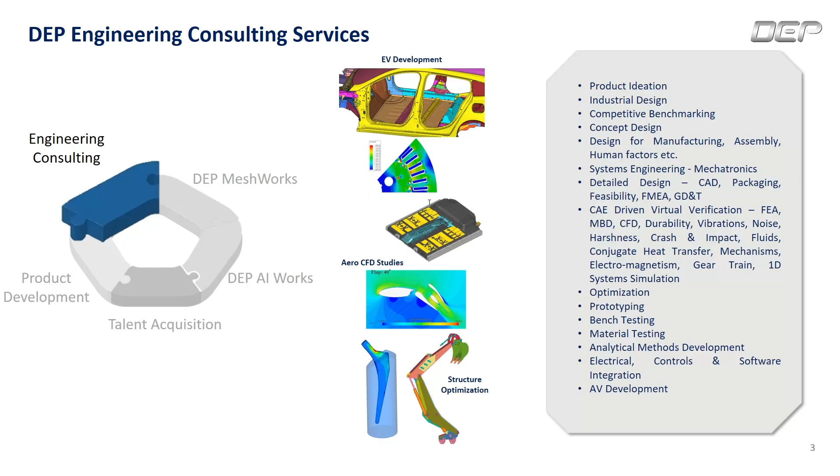Under product development, it's primarily the electromechanical product development team. This team, beyond engineering services, develops complete electromechanical products. Our capabilities include concept generation, mechanical design, electronics integration, prototype development, testing, and product validation. Whether it is electric mobility, industrial products, or smart connected systems, DEP supports the customers from concept to production.

You see the tools like power tools, electric power tools, combustion sensors, drone technology, or improving the engine efficiency. These are all in-built products that we have developed in-house.

Another key pillar is the staffing or talent acquisition team. We provide specialized engineering workforce solutions across multiple domains, including automotive, aerospace, electrification, or embedded systems, and not to mention CAE. This allows us to support customers not only with the technology, but also with highly skilled engineering resources. So we have a pool of engineers whom we place across the industries.

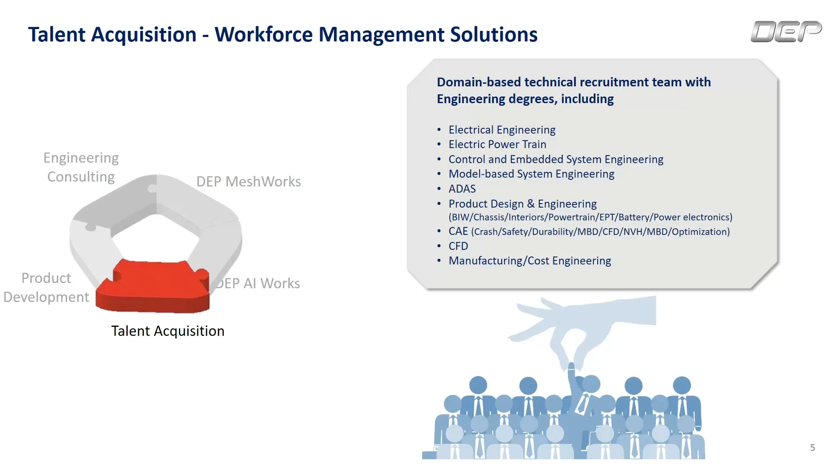Coming to the flagship product, which is MeshWorks. MeshWorks is an integrated CAE platform that helps engineers automate model preparation, meshing, concept modeling, optimization, post-processing, and other workflows. It significantly reduces engineering effort and improves productivity, enabling engineers to focus more on innovation than carrying out repetitive tasks.

Multiple modules are integrated in MeshWorks, right from meshing, where complete meshing and modeling integration can be done. Once integration is done, you set up a run for any domain, maybe crash or durability, run it in third-party solvers, and using the post-processor, we do complete post-processing of the results.

Once results are achieved, and you see it may not be meeting your performance targets, then we use concept modeling tools to create new concepts or improve the performance. For example, you add a rib or remove a rib, change the thickness of a rib or the wall of a cast component, and it can be quickly modified or changed in MeshWorks.

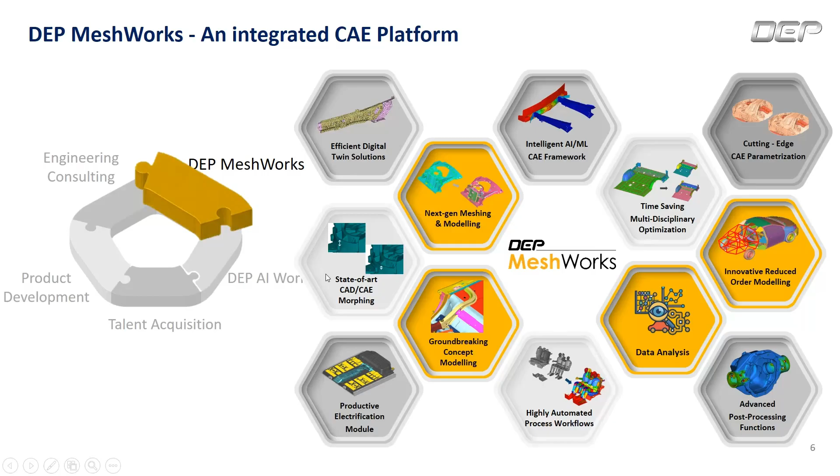Likewise, there are many modules in Meshworks. Coming to the next key component, which is today's focus, is AIWorks.

AIWorks is DEP's physics-driven predictive and generative AI platform. It supports engineers across the complete product development life cycle, from concept design and detail engineering to validation. Our technical team will shortly demonstrate these capabilities in greater detail.

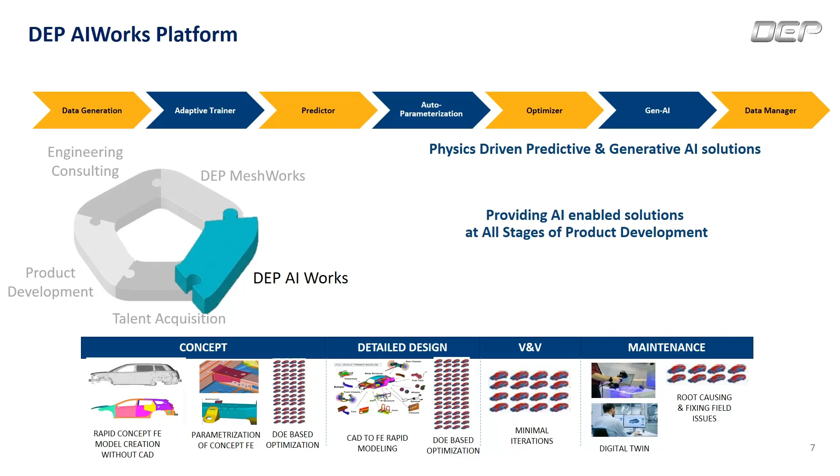With that brief introduction to DEP, let us now move to the main focus of today's seminar. Today's session will explore how physics-driven predictive and generative AI is reshaping product development and manufacturing, and how AIWorks is enabling engineering teams to design smarter, innovate faster, and significantly reduce development time. It is now my pleasure to invite Mr. Arul Ganeshan and Jashwant, who will take you through the technical presentation and demonstrate the capabilities of AIWorks.

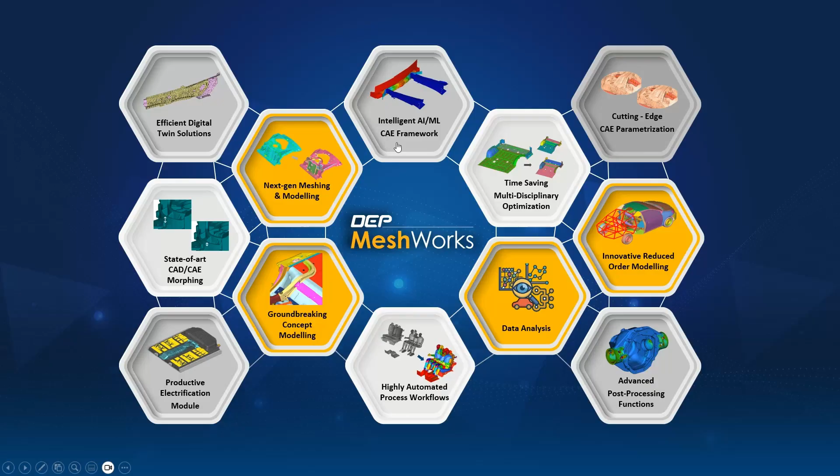Our focus today is on AI Works itself. This parameterization will come back in the scope of Features AI. But AI Works is the AI module within Meshworks. In fact, we have branched it out into a separate entity, which we're calling DEP AI Works. Within AI Works, we have 4 sub-modules: Simulate AI, Features AI, Geom AI, and Agentic AI.

Simulate AI is the ability to have a surrogate model for performance prediction. So we give the CAE engineer the ability to take any historical data he may have—solver input data, solver output data for some designs he's already worked on in the past. He can take that data and create a model using the library of architectures available within AIWorks, and use that as a quick predictive tool, a quick answer to help give quick feedback to the design engineer. So that's the idea of Simulate AI.

Features AI, as we explained, helps in the meshing process by automatically recognizing CAD features that may be repeated in your organization, and then using that recognition to apply a custom mesh or a custom type of modeling for that, if it is a fastener, for example.

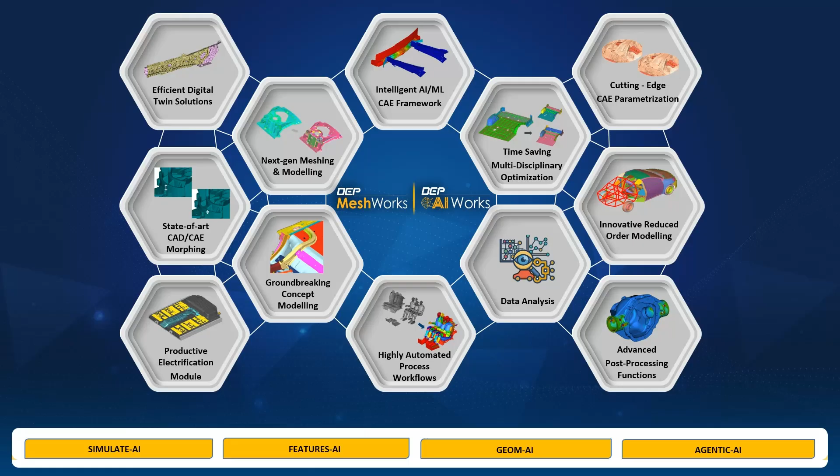So a quick recap of what Simulate AI is. Again, it's a surrogate approach to performance prediction. It involves a sequence of steps. It always starts with data—we need a decent amount of data to build a model. But if you don't have data, we can help you there by using the parametric capabilities within Meshworks.

Take 10 models and make that into 50 models by parameterizing the design and then exporting 5 models for each baseline design. And obviously you run the solver, and now you have 50 different designs which capture the variation that you are going to expect and need to help predict.

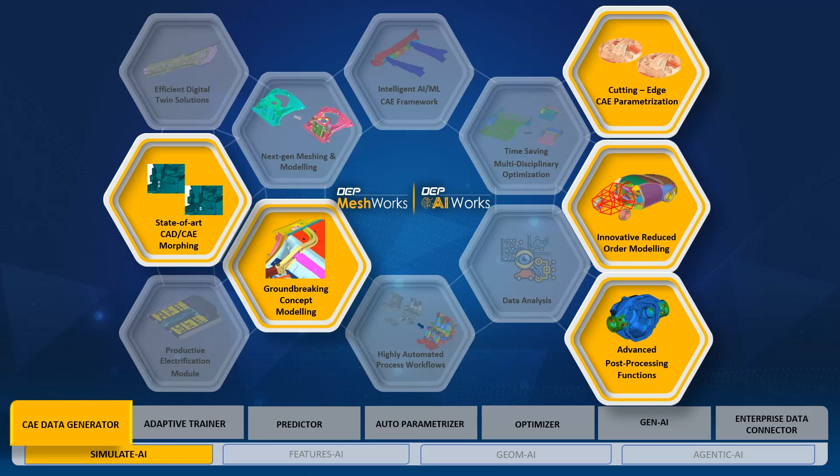For the AI model, those are supplementary tools to help you make up training data if you don't have sufficient. And then the heart of AIWorks is the adaptive trainer, where we have a library of deep learning architectures at your fingertips, so that you can adapt your particular problem to a particular architecture and use that to create a solid predictive model. This is the workflow.

I think it's not new to most people, but you start with data. You have, for example, 50 different STL files of exterior profiles, and you have 50 drag coefficients for each of those profiles. So now you would like to create a predictive model to be able to bring in a new exterior profile. You don't want to run a CFD analysis.

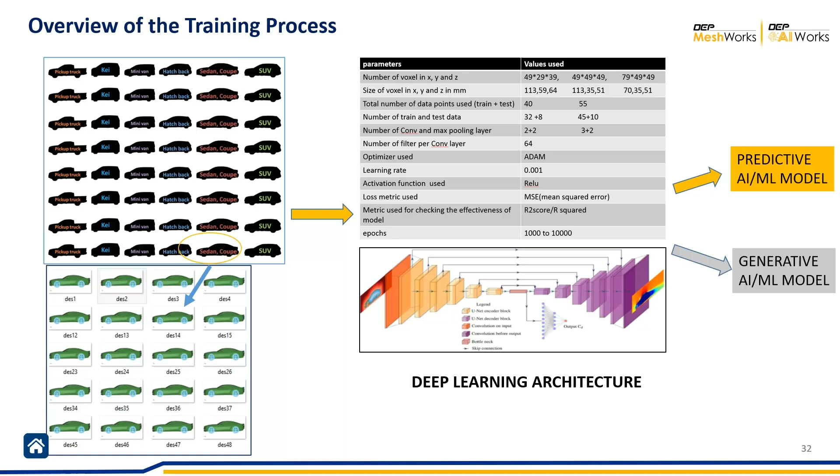In a few minutes, you want to predict the drag coefficient. So you take all 50 profiles and their associated drag coefficient. You use an architecture available in AIWorks, create a model, and then next time the styling engineer provides a surface, you can bring it into AIWorks, click a button, and within a few minutes, you will get your drag coefficient. So that's the idea, and this surrogate approach is becoming more and more popular in the CAE world, as companies try to speed up their product development process and give the company a competitive edge.

So what can we predict using the surrogate approach? We can predict scalars—the example I just talked about was a scalar response where we are predicting a number, a drag coefficient. We can also predict vectors, a force displacement type of curve or an acceleration time curve.

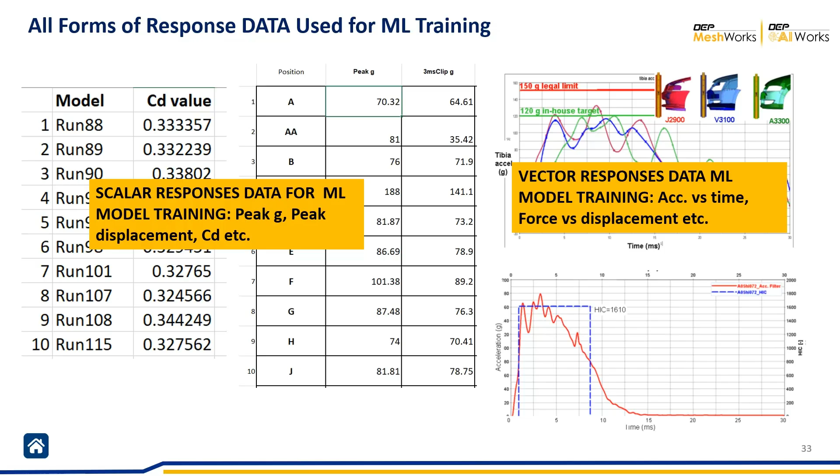So whatever a physics-based solver gives you as a metric for your performance, a surrogate approach can be created. We can also create a surrogate model for contours, like a pressure contour, a velocity contour, etc. We can also create a model for predicting the time history.

Suppose you're interested not only in the final displacement and stress profile, but you want to see the sequence of deformation steps from the start of loading to the end. We can create a model that gives you all those time steps. Obviously, the memory and time taken to create such a model will increase because there's more data, but it is doable. If you are using a superelement type of analysis, where you're representing a submodel in your larger model as a stiffness matrix, we can create a model to predict stiffness matrices as well.

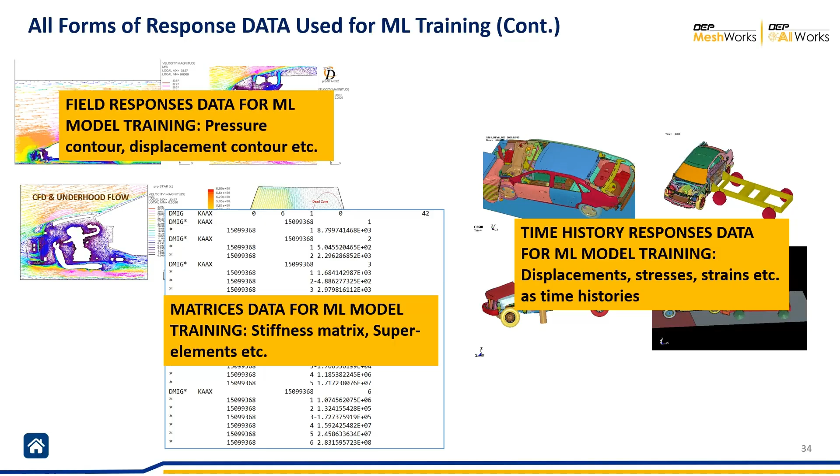Now we just want to give you some background on CNN. Again, I don't want to repeat the first session, but CNN uses the same logic as you would use in an image recognition architecture.

You pixelate an image and associate a label in the image to the topology of the pixel. By training it with several images, you can bring in a new image, and by identifying the pixel topology, it will return the label or the number.

So it's the same idea we are using for performance prediction, for example, drag coefficient. Instead of a 2D voxelization, we are doing a 3D voxelization. We are taking the full volume of the training set, discretizing it as cuboids or voxels, and trying to make a relationship between a particular voxel topology and an associated drag coefficient. By training this type of data, we can bring in a new exterior profile, and the model will predict the drag coefficient.

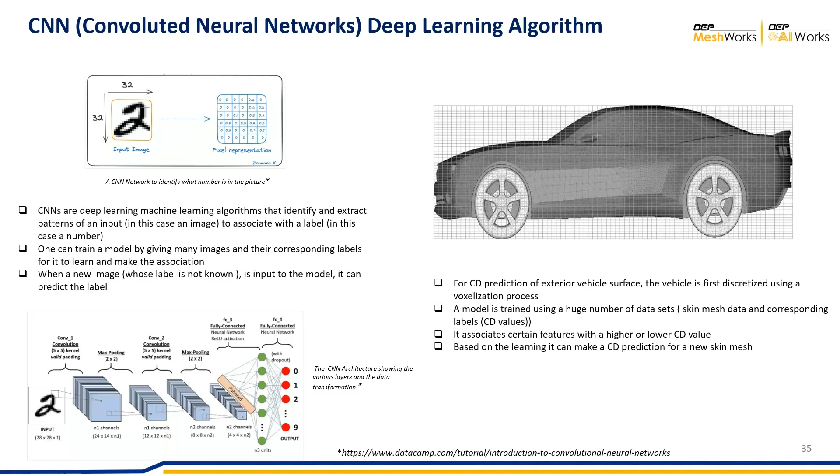We've got very good accuracy, to the point of 99%, with that CNN approach for scalars.

A more popular architecture is graph neural networks, where data is stored in the form of a graph. You have a nodal XYZ and connected nodes, and you can try to make an association between that data and the corresponding nodal output. For example, the node XYZ and the corresponding connected nodes in your mesh, and the pressure at that node, can be an output for training.

So this is a graph neural network. It works well because most of our CAE models are in the form of a mesh. So you have a node which has an XYZ coordinate, and you have connected nodes through the elements.

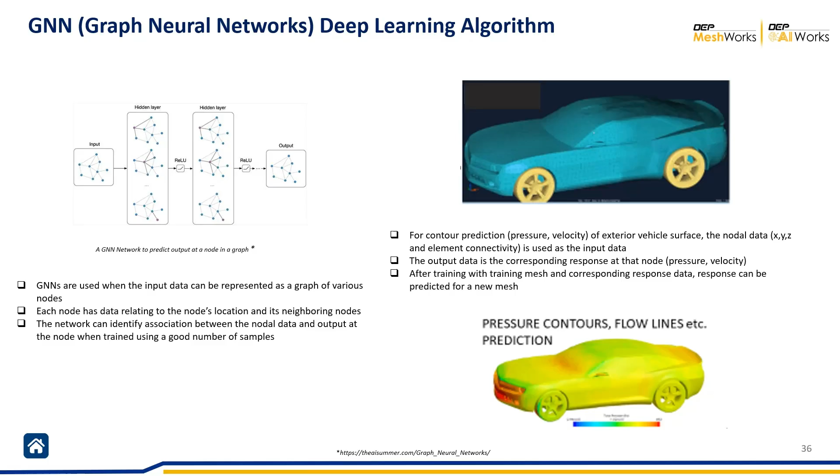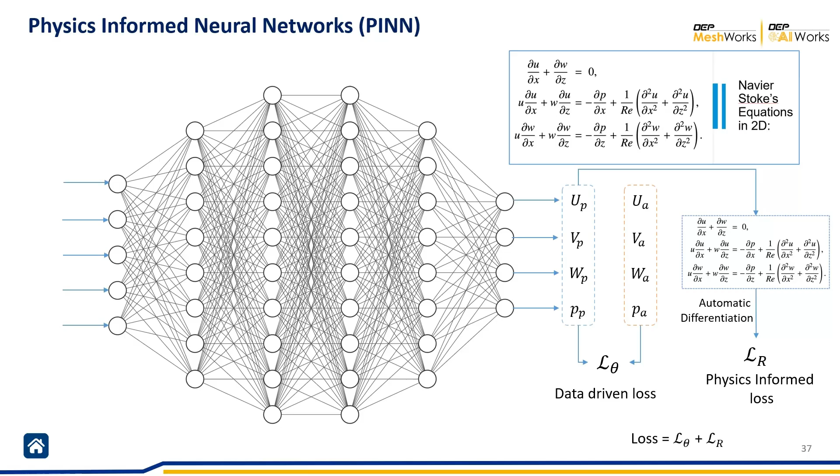Something we also use quite a bit is physics-informed neural networks, where we bring in physics laws in addition to data-driven laws to help guide the training to a more physically satisfying solution. What I mean is we're not just trying to fit data, we are trying to make sure that the solution matches the physics of the problem as much as we allow it.

The other good feature within AIWorks is the ability to give some intelligence to the training. We can force certain nodes to be zero displacement when we know that they are constrained nodes. And when there is an area of interest, like on a hood where the indenter hits the panel, we can focus our training on those areas so that the loss is reduced even further compared to the general area of the hood.

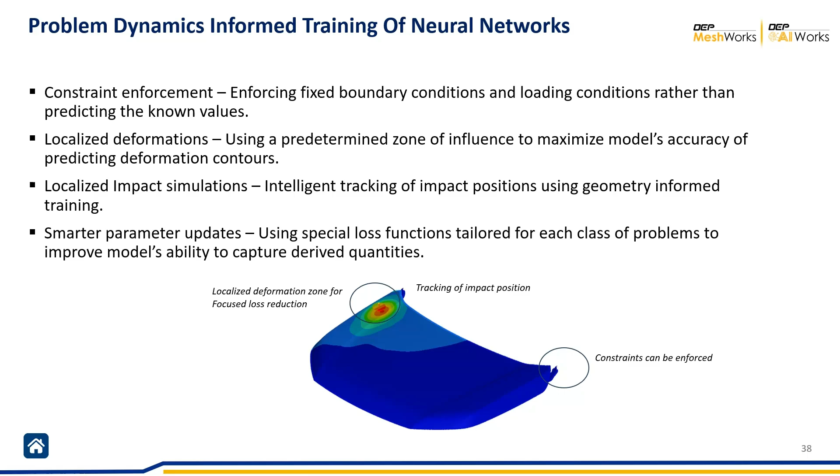We also have good metrics to evaluate a machine learning model, and also metrics to check if a model we are going to use on unseen data is actually a good value.

Sometimes we have a machine learning model based on a few specific types of training data, and we want to use that model to predict the response of very generic input data. We know that's going to be a challenge, but before we even attempt that, we can do what is an equivalence score. It's really a quantification of how new unseen data fits in with the original training data. The idea is if it fits in well, then we know the prediction is going to be good accuracy. If not, we can't expect a good accurate prediction.

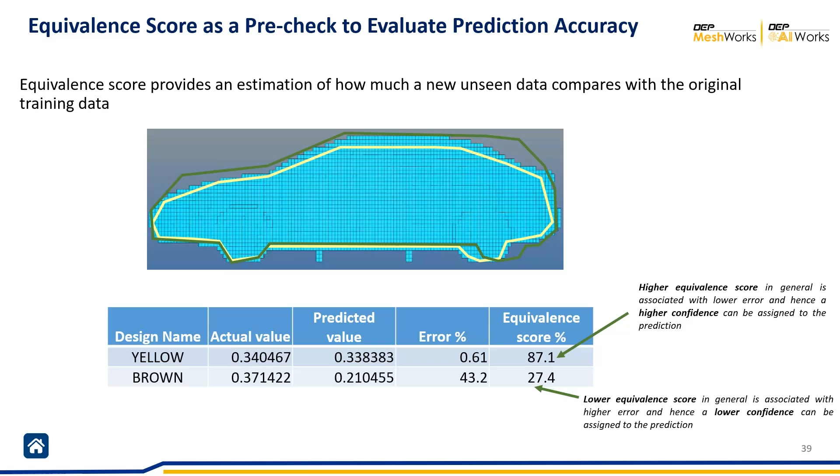So there are tools to help you in that. The auto parameterizer helps you parameterize automatically without the investment in time of manual setup.

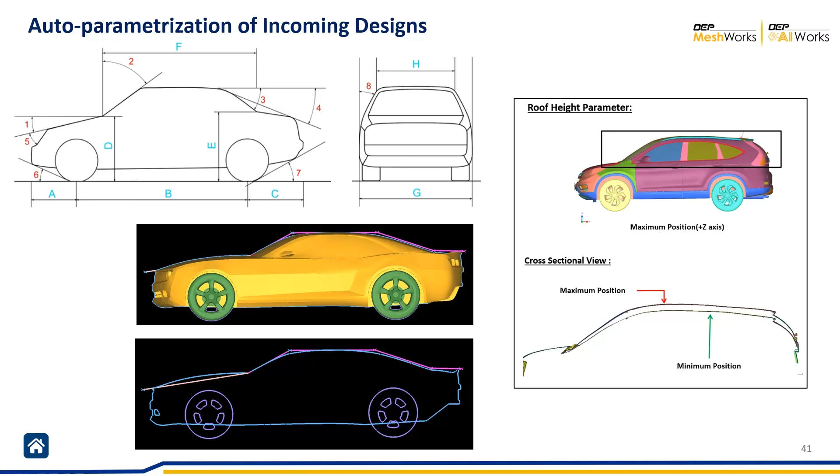So if your baseline model is not meeting performance and you want to improve it, or you just want to do what-if studies, you can use auto parameterization to parameterize your model, and then use the optimizer's inbuilt algorithm, which uses the design space defined by the parameters of the model, the min and max values, and allows you to optimize for mass or a particular performance criteria. The only difference is it's now using the machine learning model as a solver as opposed to a CFD or a Dyna.

This really speeds up the whole optimization process. What might have taken a week to run can now be accomplished in much less time, and we've given lots of examples of that in the last two sessions.

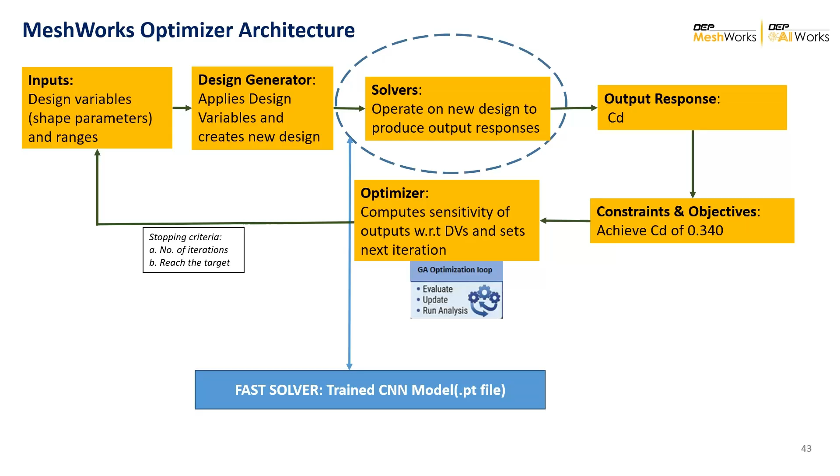One example is this drag coefficient, where you can quickly ask the solver to give you a shape that meets a particular drag coefficient. So you have a well-trained machine learning model and a parameterized design, and it will iterate within the min and max ranges of the parameters and arrive at a solution that meets your drag coefficient, providing the value for each parameter. This is very powerful, and we know organizations that have adopted this type of approach.

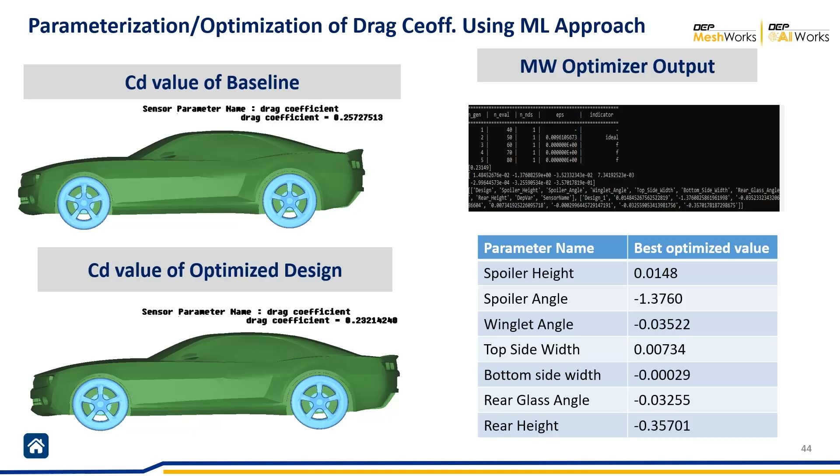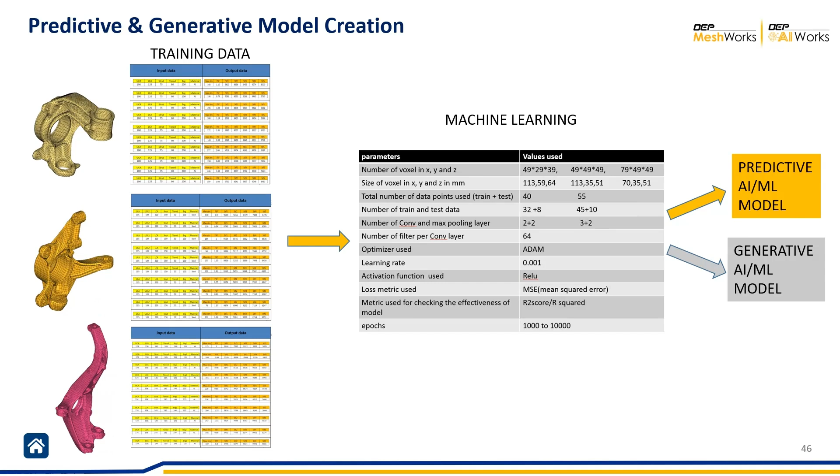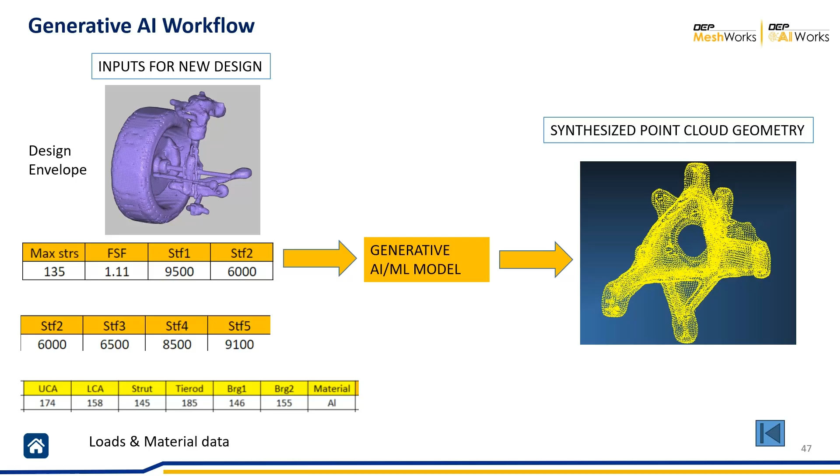Gen AI is the idea where you're not using a model to predict performance of a design - you're specifying the performance you need, and the model returns a design that matches it. Think about a knuckle that we have lots of data for; we have the stiffness at the interface values. When we have 500 or 600 data points, that's the number we need for a Gen AI model. We can train a CGAN architecture, a generative architecture, to take in specified performance, and the model will return a point cloud. It won't give you Nastran data or CAD data, it will give you a point cloud, and we can take that point cloud and create a concept mesh with it. That's the idea of Gen AI.

To be able to manage all this data, we have a good data connector architecture. When you create a machine learning model once, it's not done - sometimes you get new training data, so you can continuously augment your model by adding that to the training, maintaining a good model and updating it as training data becomes available. For that, we provide a good database to manage it all.

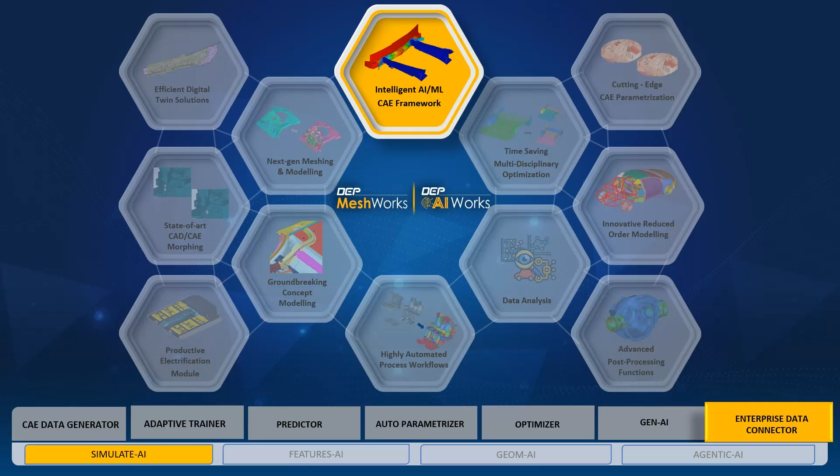So the focus of our discussion today is features AI, where we're helping the meshing process using AI models. Again, there are three steps: parameterization, data creation. To train a model to recognize certain CAD or mesh features, we need a lot of data, and sometimes you may not have sufficient data, so we provide tools to help with that.

One of them is the CAE parameterization that Ravi talked about earlier. Again, the idea is you have a baseline model and you parameterize the critical or structural features that impact performance. From one baseline model, you can create 30 more models without doing any manual remesh, without going back to CAD and creating new CAD designs. Everything can be done in the CAE environment.

And with the click of a button, you can create a good number of DOE samples. It does require some setup where you establish your control nodes, the direction of motion you want to influence, define the boundary nodes which move along with the control nodes, and then define the constraint nodes which don't move at all. But once you understand this concept, you can take a design and create many parameters on your own, specify a min and max range, and quickly create a DOE for your optimization or other purposes.

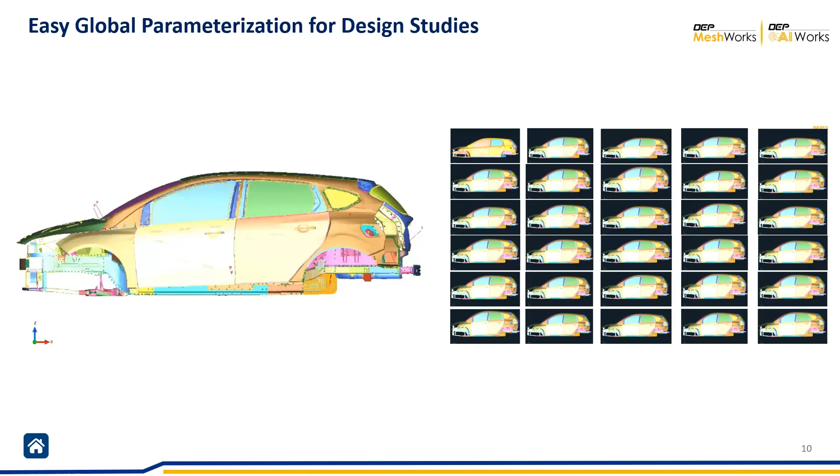The parameterization can also be at a very local level. So local features like ribs, holes, slots, welds - we can parameterize the number of welds very easily. Weld optimization can sometimes be a pain if you're manually changing the position and number of welds. But once you create a spot weld parameter, you can easily go from 100 spot welds to 60 spot welds.

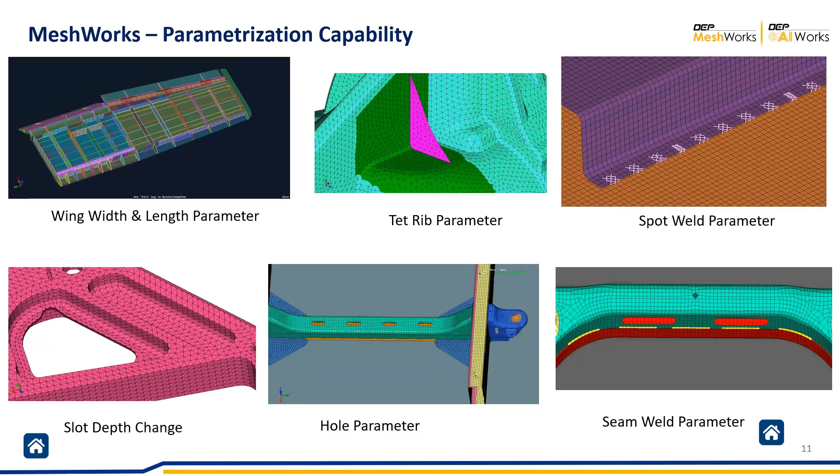It will automatically readjust the length between the welds so that it is a good, nice connection made between two parts. So the idea is, in your training for Features AI, where you don't have enough data to train a Features AI model, you may be able to use tools like this to add more data, creating more features or changing their shape so that even subtle differences in your feature can train the model to recognize that. The more data, the more accurate your Features AI model will be.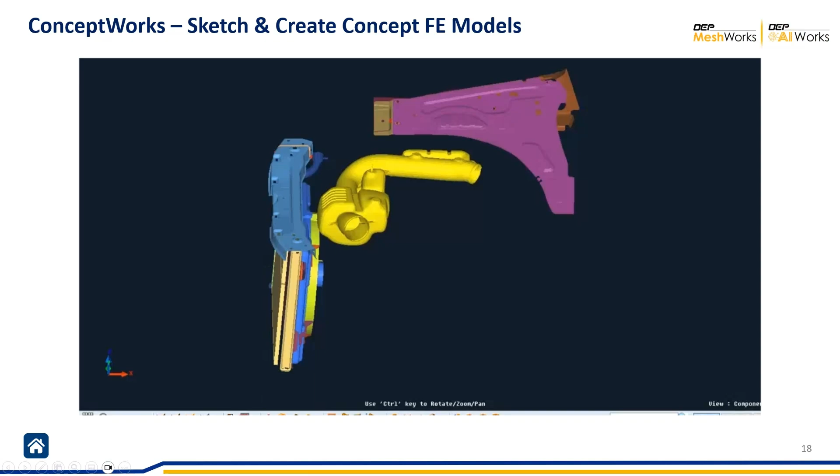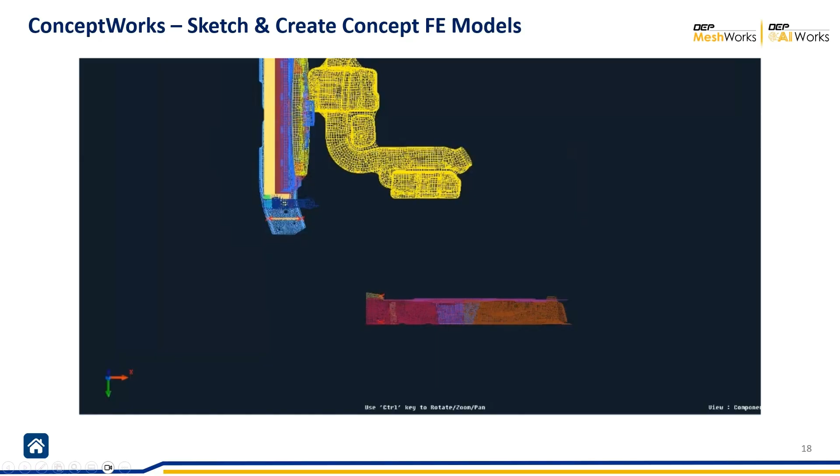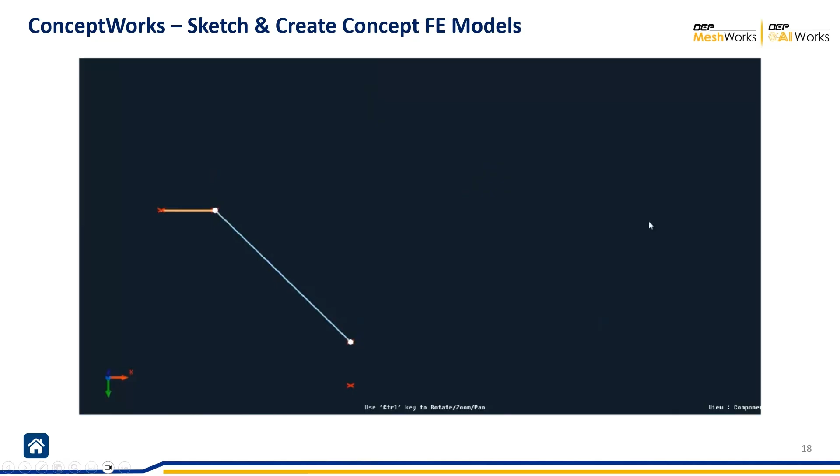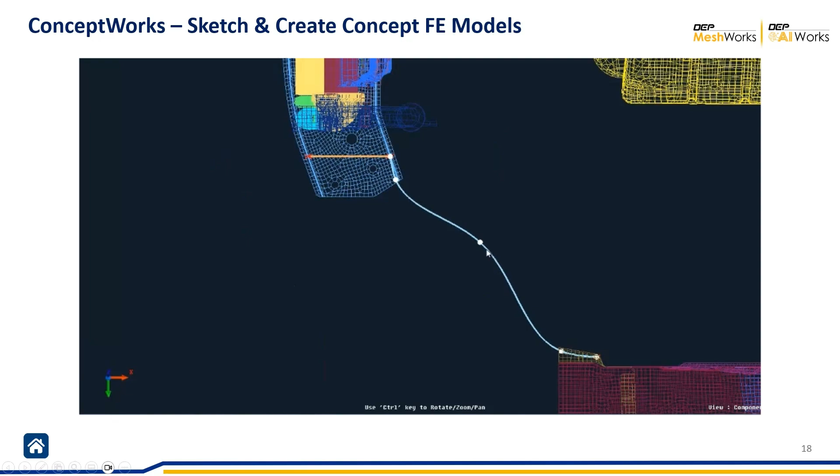Another tool available to augment your training data for Features AI is concept modeling, again alluded to at the outset by Ravi. This is the ability for a CAE user to create his own designs in the absence of CAD. For example, in a concept design, you have a tie bar and a fender, but no connection between the two. Using tools within ConceptWorks, you can create a line between these two parts and then change the line to mimic a structural member, a continuously flowing structural member, and create a link between your tie bar and your fender.

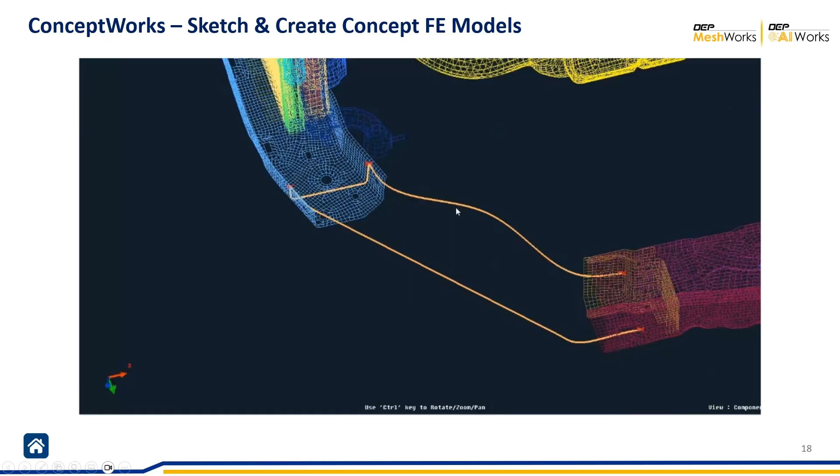You extrude that to create an actual 2D section. So tools like these, to help create models when you don't have CAD, are particularly useful. In the context of Features AI, you may need to use these kinds of tools to add to your database - for example, doublers, when you want to create a reinforcement.

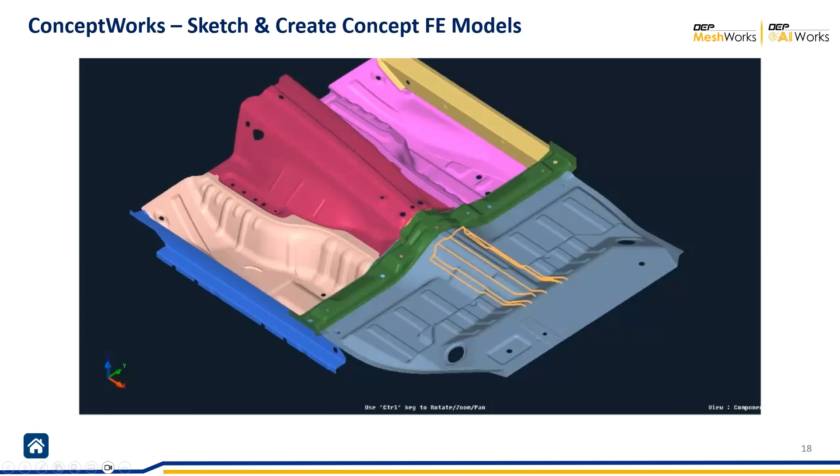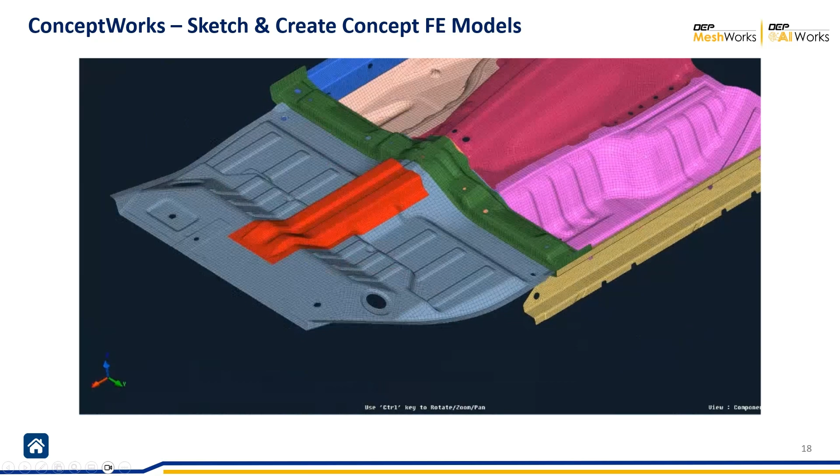You don't want to lose time asking the CAD engineer to provide CAD for that. You can take the elements of the parent sheet metal and then create a reinforcement using these lines as shown here. So these are very powerful tools to help you generally in product development at the concept stage, but also in adding to your training database.

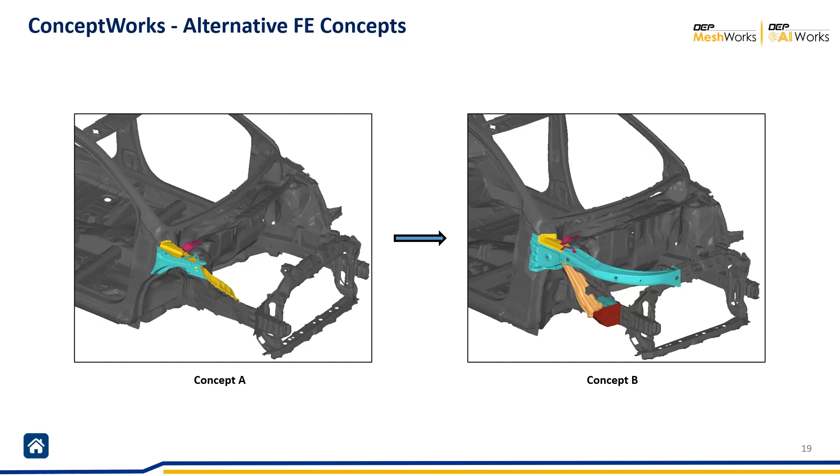Sometimes we are playing around with different concepts for a particular load path, so ConceptWorks can help you in that regard as well. At a local level, if you want to add more ribs, you're able to use ConceptWorks to quickly create ribs - no need to create CAD first and then create a rib. So the idea is we have a tool here that helps you create designs when CAD is not available, and this can be used for supplementing your training data.

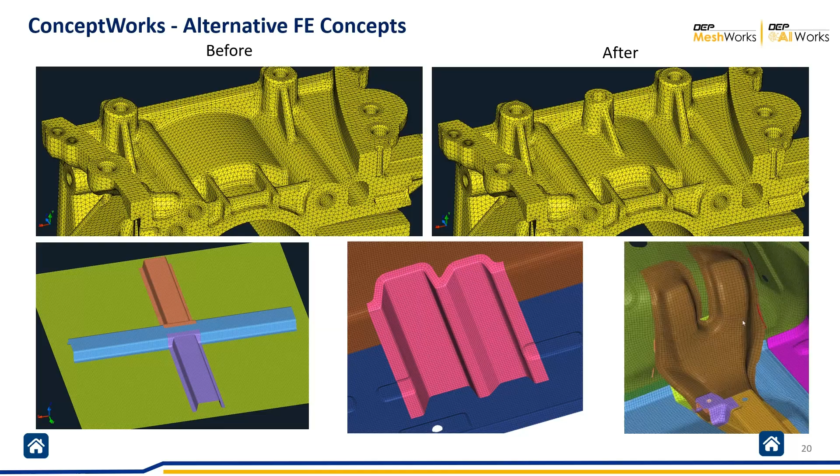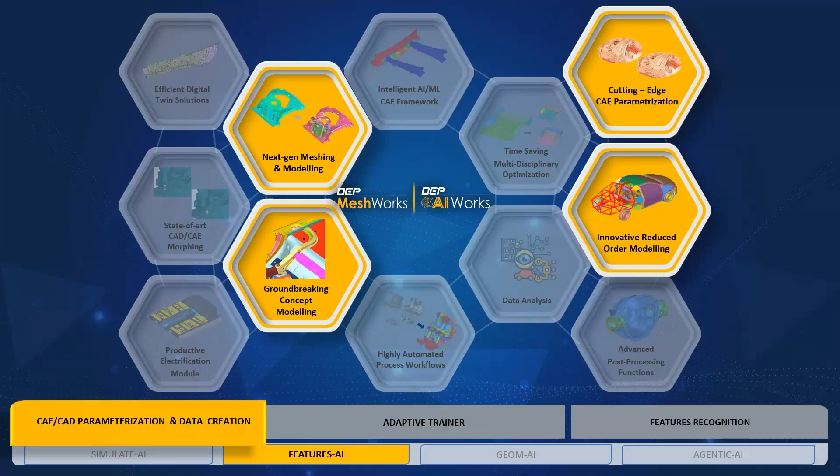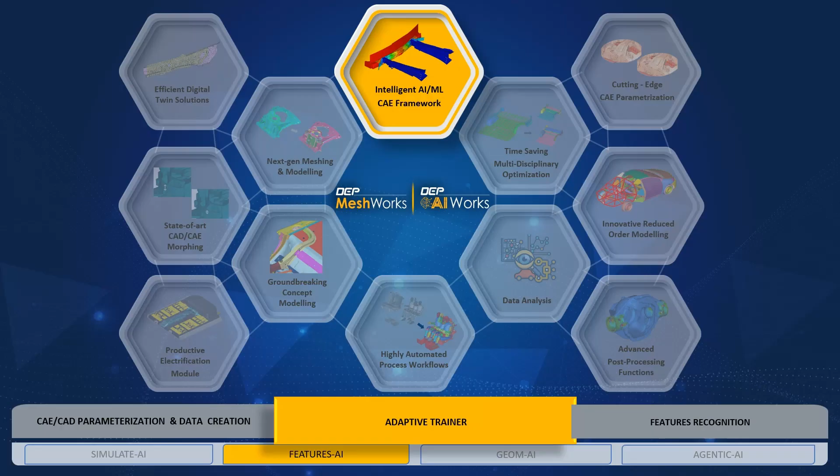So we've talked about the tools to help you with data creation. Now we go to the training itself. Again, we have a library of architectures you can use for Features AI - we won't repeat that, but whatever is available for Simulate AI is available for Adaptive Trainer as well.

The feature recognition - how do we use the Features AI machine learning model? You have trained a model to recognize certain features, and now using that model, you can bring in point cloud data, scan data, or STL data from a CAD package, and the machine learning model will recognize certain features you have trained it for. What you do with that recognition depends upon you.

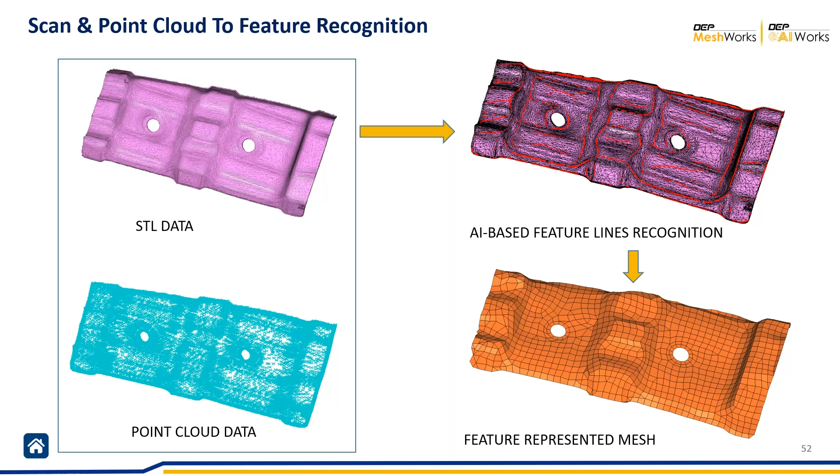You may use that recognition to create or apply a customized mesh. Sometimes these features are a bit complicated but very important for the performance of the structure, and people spend a lot of time getting the right element size and the right number of nodes around the hole. To avoid that time of manual mesh creation, we are able to use the machine learning model to recognize it and apply a custom mesh, as we show here.

So we are going to show an example of a clip. A clip is a part that is used quite extensively in plastic assemblies, in IPs and interior parts of the vehicle. So we don't want to spend the manual effort of creating the mesh each time.

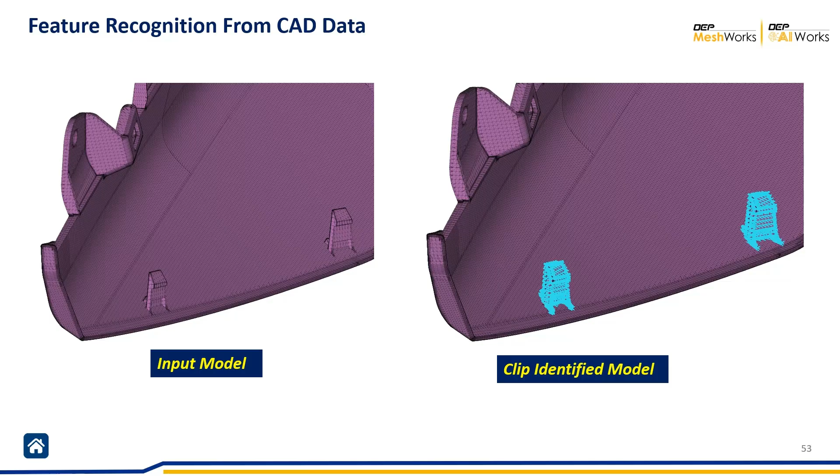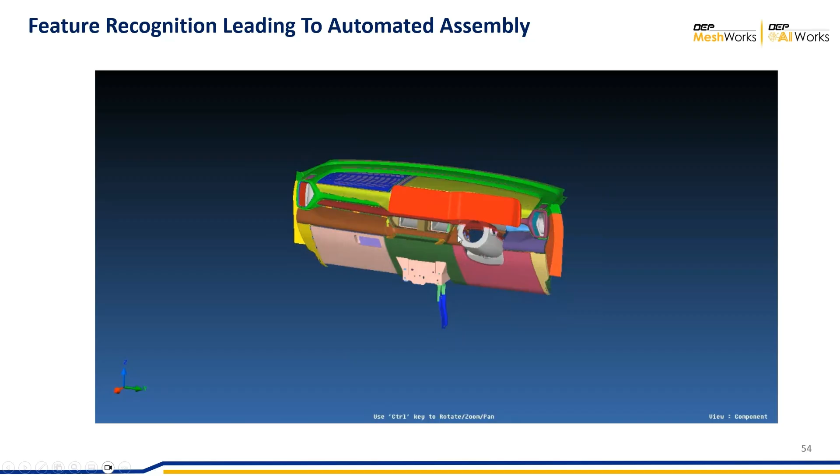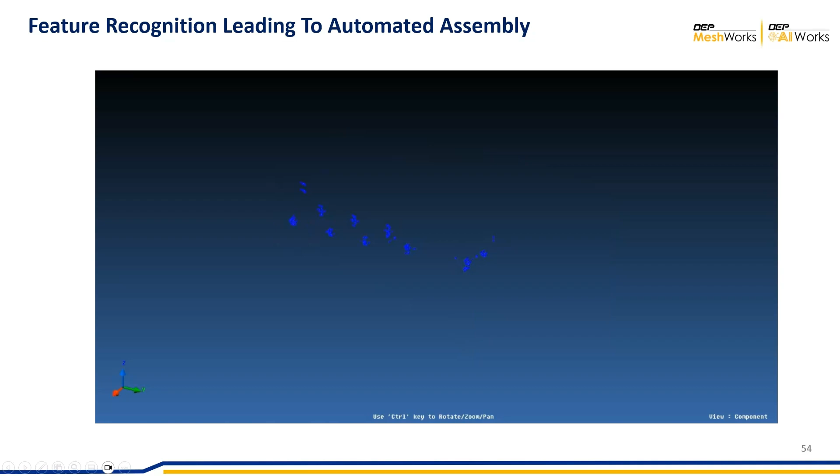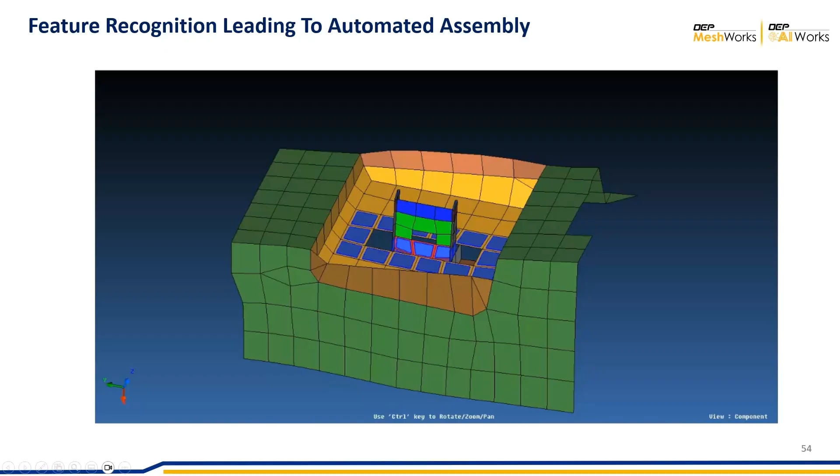Maybe there are tools within your pre-processing to do that without AI, but with AI, we take it a step further where we allow for subtle differences, and we recognize those differences and apply a customized mesh. For example, we have an IP structure where these types of clips are used extensively. As soon as it recognizes these clips, we can enforce and automate a particular type of modeling for them—automatically creating the type of fastening model you like. If it's a safety model, maybe rigids are okay; if you're doing something like an Abaqus where you need to account for preload, maybe you use a contact 3D approach. Whatever you like, as soon as a feature is recognized, you can enforce a particular type of model for it. That's the idea of features AI.

We will give you some more understanding of this through a live demo. I'm going to pass it on to Jaswant, my colleague, to show a live demo of how this works. Thank you, Arul. I will go and share my screen.

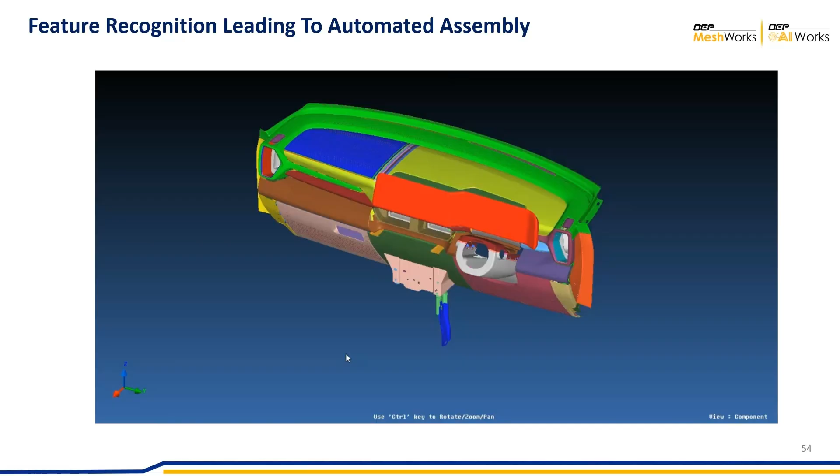So far, Arul covered how MeshWorks can be utilized for data generation, and how AI can be used for performing various types of surrogate model building and AI models for identifying features. I'll be showing a quick demo of how we can identify one such feature.

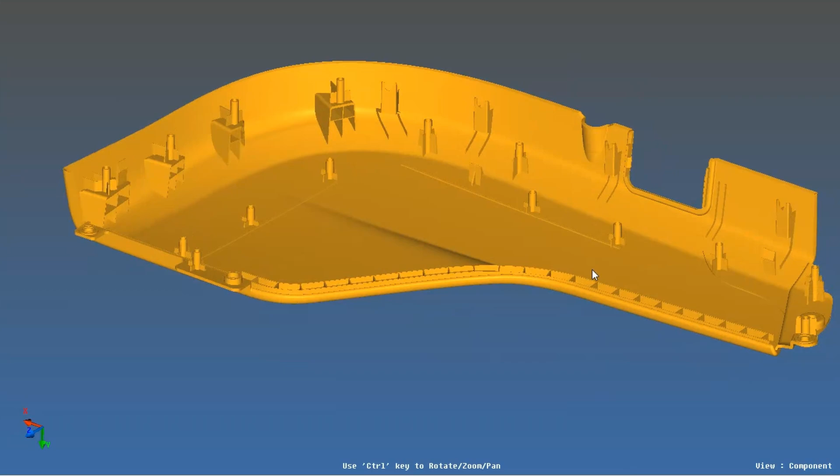In the display, we can see multiple features here with us—toggles, heat stakes, everything. It would be a tedious task for a user to identify clips among them and proceed with their task. So what we've done is build an AI model which will identify these clip kind of features in a minute. Let me go ahead and select that AI model.

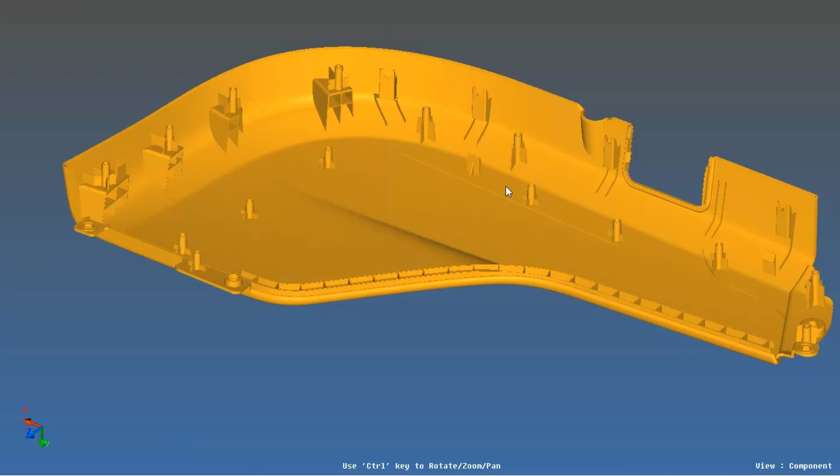Then I'll provide an output directory which will dump the required log files, and say find features. Now this AI model will interact with the CAD in the canvas, be it CAD or FE data. It will identify the required features we've selected for. So when I run it, we can see it has identified the clips.

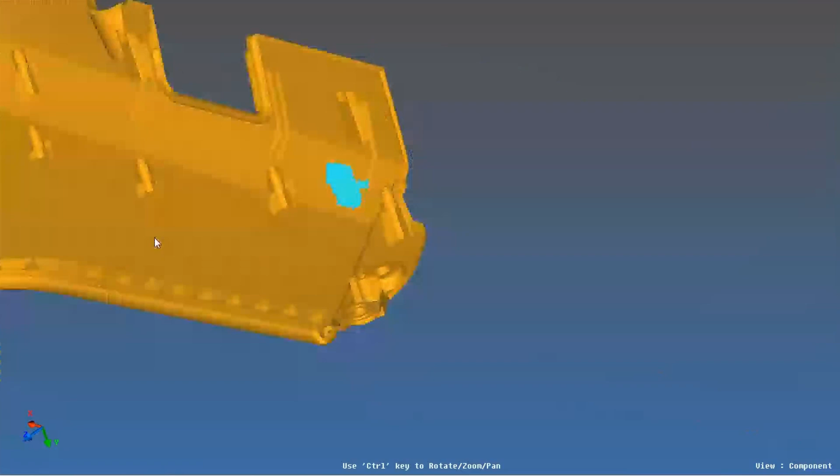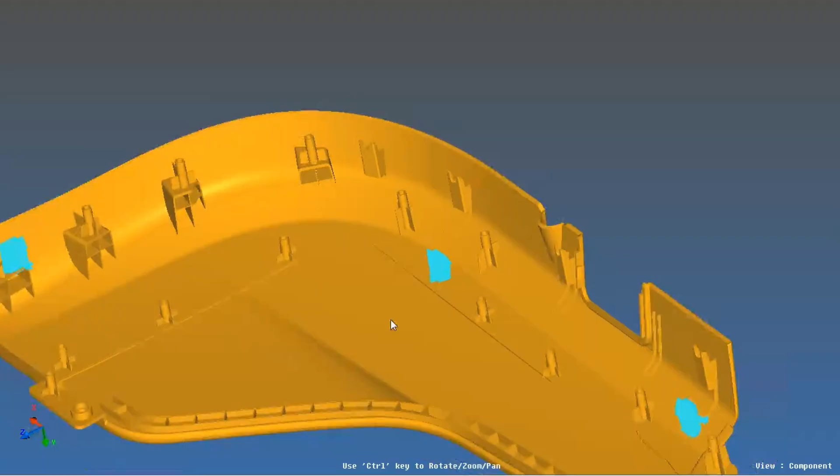If you observe closely, these clips vary in different geometries. Over here there's a flat and a rib-in-notch, whereas in this region the clip has a step, and the rib has a different feature. Similarly here, it's a different kind of clip. If we train an AI model to identify a particular feature, it will get the job done for us.

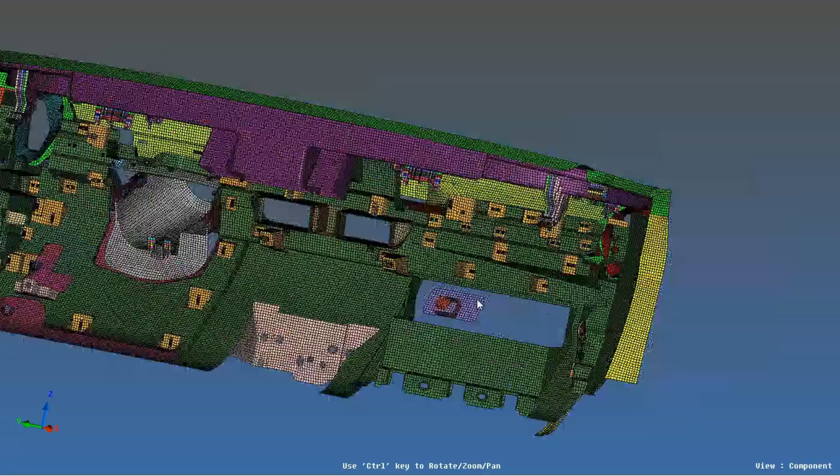Now the question may arise: what do we do with this feature recognition? Now comes the next demo, where I have an IP panel like this. As a user, we know how time-consuming and tedious it is to connect the clips here. Let me hide this.

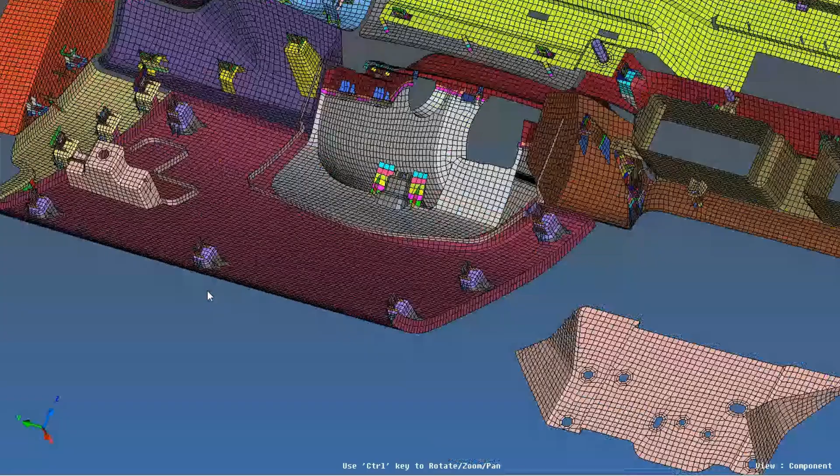We can see there are multiple clips in this model, and at each and every location a user has to visit and create a rigid or create a contact—as Arul mentioned, based on different load types we may need different connections. So as such, it will take hours to complete this process.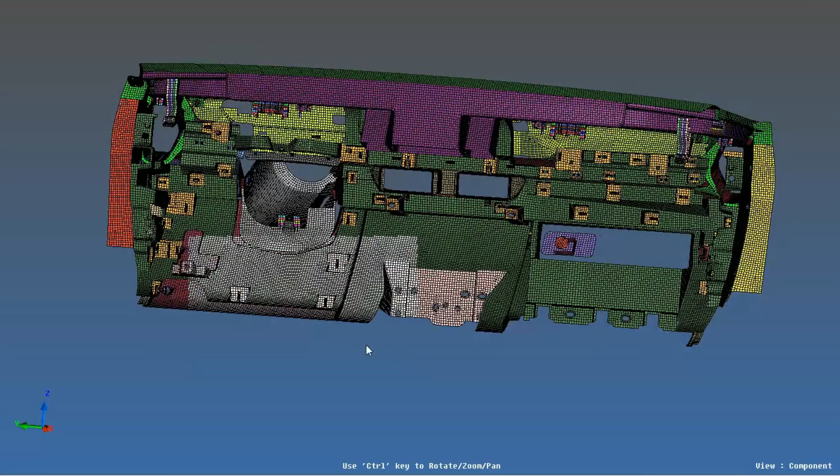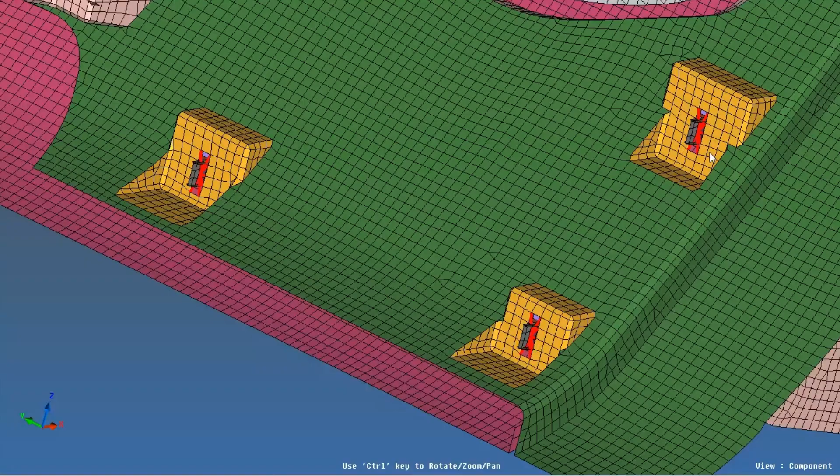Now, what we've done is made use of this feature recognition, and in the interest of time, let me select a small portion. You can see I've selected some regions where these clips are. What I'm going to do is simply say execute. This AI feature recognition will come into action, identify regions where the clips are present, and create rigids only in those regions. You can see, right?

Like this, we can build multiple AI models to identify different kinds of features and integrate them into our daily workflows to reduce the time from hours to minutes. Imagine this entire IP would take an hour or two to complete—with this tool, we can get it done within 5 minutes.

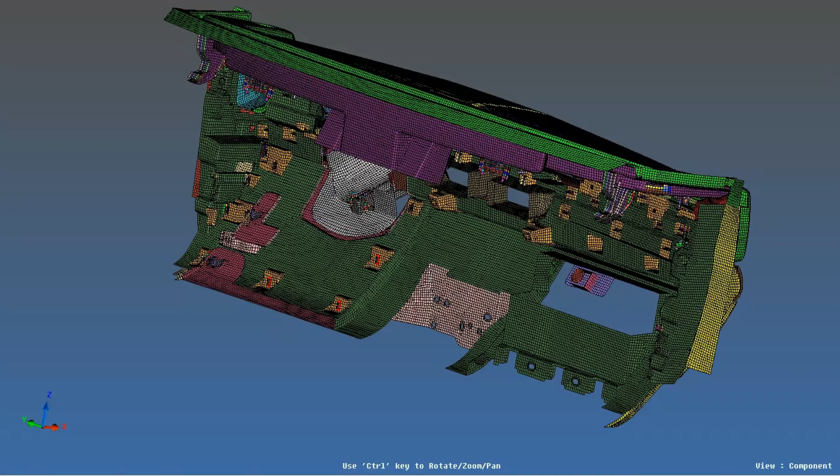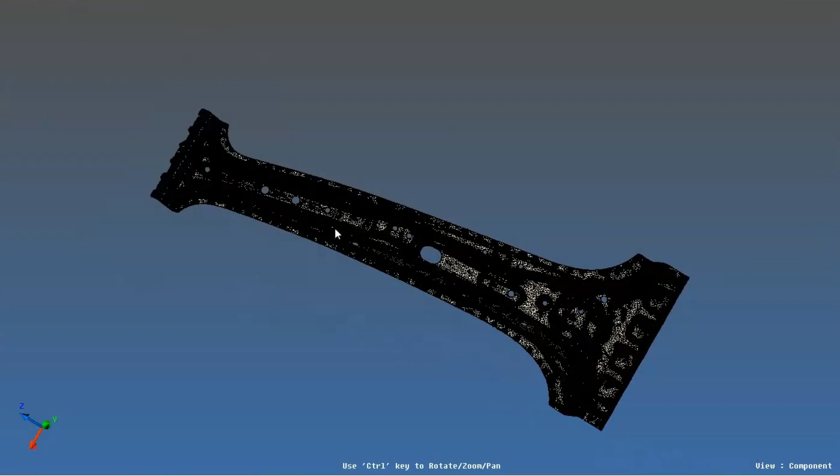Let me go to the next demo. Here we have point cloud or STL data like this. So our input can be point cloud data like this, or it can be STL data like this. If a user has to convert this STL data into a workable FE mesh, it would take days to be completed.

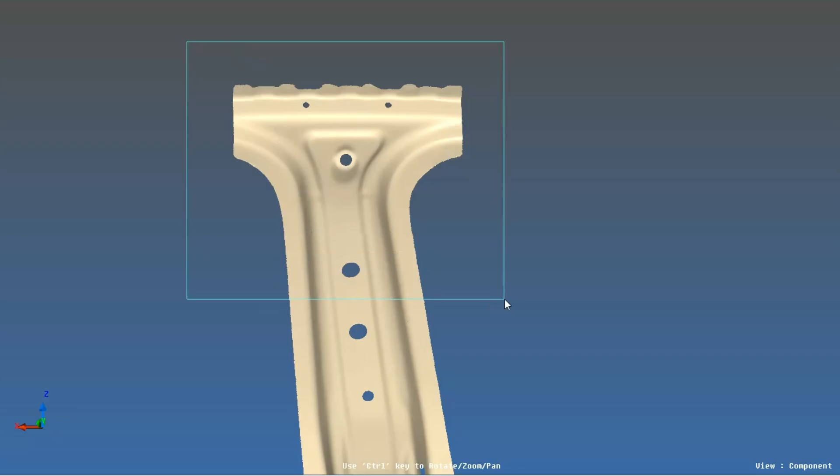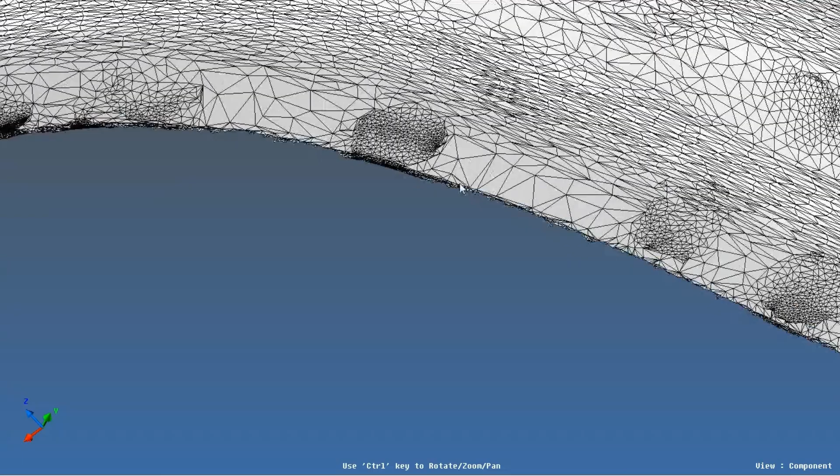So I will show a portion of how we are using the feature recognition technique to convert a scan to a workable FE. Let me select a portion of the scan data, STL data. If you observe, I'm selecting randomly, and you can see the selection is jagged. Also, the edges are not defined properly. So with this, the user can't use the STL data directly. We have to do some modification or extract a different kind of mesh from this.

So we have built this tool where the feature recognition comes into action, and will identify features such as fillets, holes, flanges, etc., then separate them and treat them differently to produce a workable mesh. We have multiple options here which enable us to achieve the required function. So this correct holes option, based on the radius provided by the user, will identify all the holes within the selection, then create a washer.

Let's say I want a washer of 3.5 mm washer width. Then correct flanges, if I check this option, what it does is simply treat the flanges which we saw earlier, having dents and node shoot-out kind of things. So this will be taken care of by simply checking correct holes and correct flanges.

Now comes the quality correction part. When we create a mesh from this STL data or scan data, it should be a mesh where we can perform analysis, so we have to consider quality aspects as well. Based on the input provided by the user in the quality panel, it will take those into consideration and correct the mesh accordingly, all while maintaining the features such as fillets, flanges, holes, etc., into consideration, and give a workable FE.

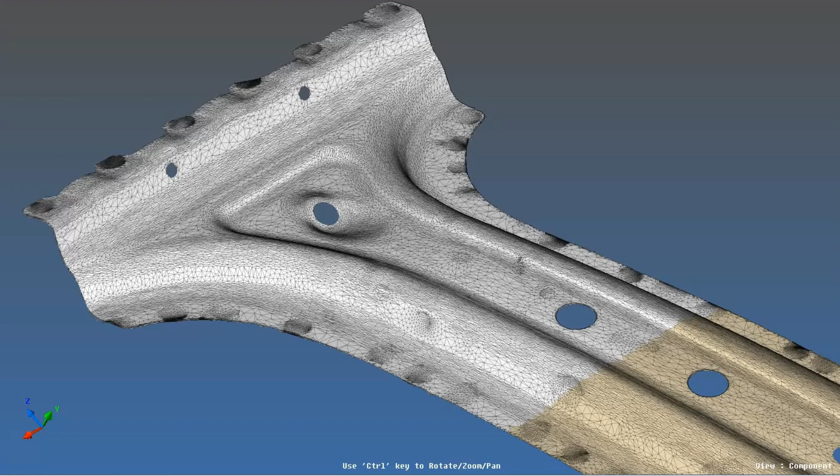Now all I need to do is simply click on scan to FE. All the things I have defined will work in the background, from feature recognition to generating a mesh of proper quality, giving an output which can be used for a solver run. It will take a minute or so, less than a minute, and we'll have the portion we selected converted to the FE. It's almost done.

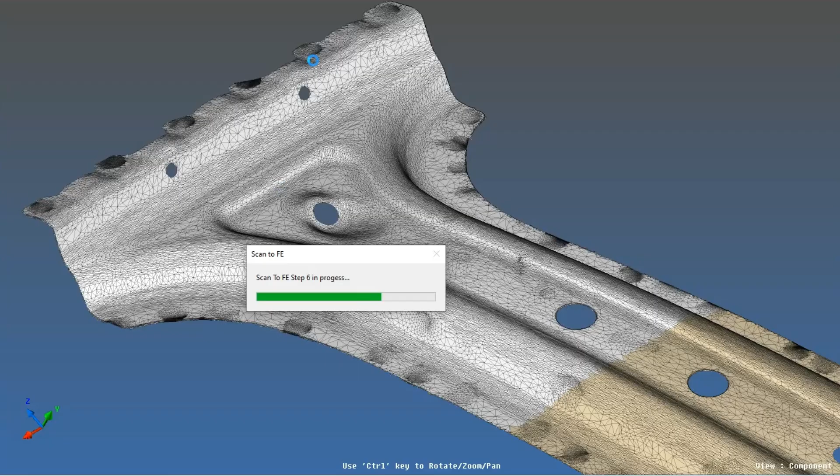There is also this one additional feature, where if we find that the scan to FE is not giving a proper output or needs to be enhanced further, we can create our very own features and imprint them in the FE as well. So that option is also there. Not only is the user generating a mesh from the scan data, the user is also controlling how the mesh needs to be. We can see this red color line indicates that the feature identification has happened.

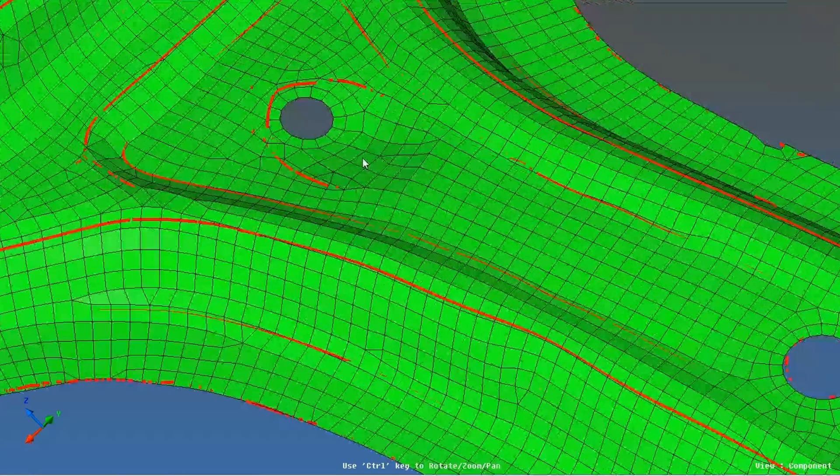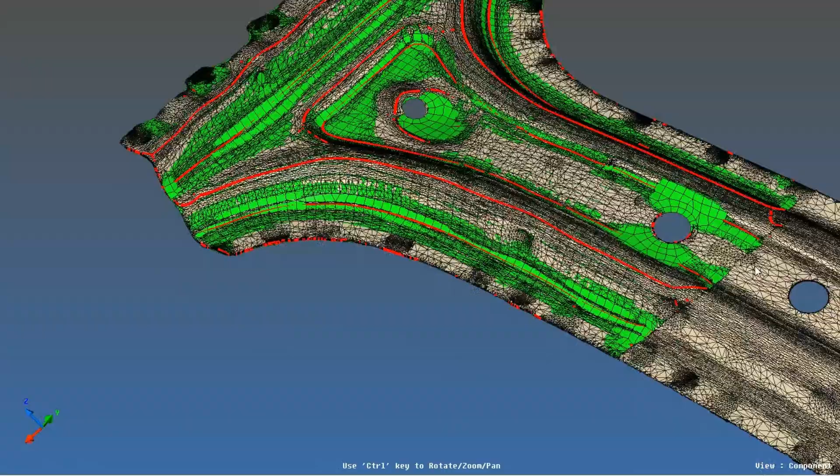If I turn off this scan data, we can see the flanges are corrected properly, holes are treated according to the washer thickness we provided, and the stamped kind of feature is also taken into consideration. Starting from here till here, where we selected the FE, even though I selected jagged kind of layers, it has nicely identified that and made the FE projected properly. So with this ability, the user can easily generate FE from scan data or point cloud data.

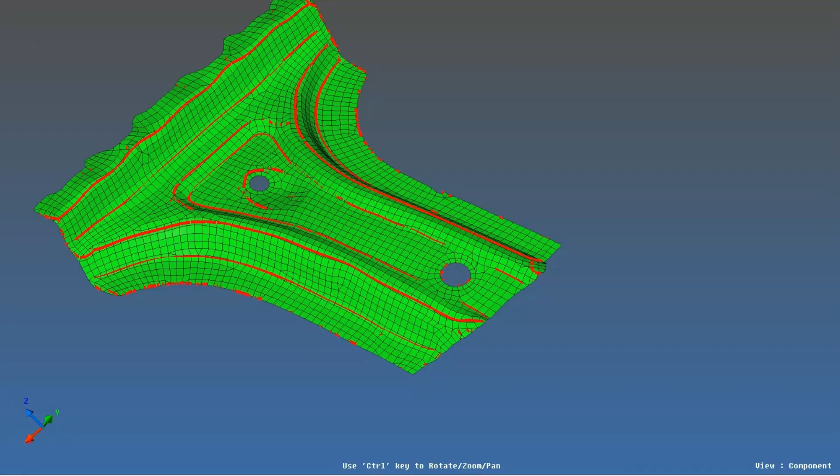From point cloud data, we'll discuss in detail in our next session. So for now, I will show you the output here. You can see this is the scan data, and if I hide the scan data, we can see the FE generated - how nicely the FE is generated, taking into consideration all kinds of stamping features, holes, slots, everything.

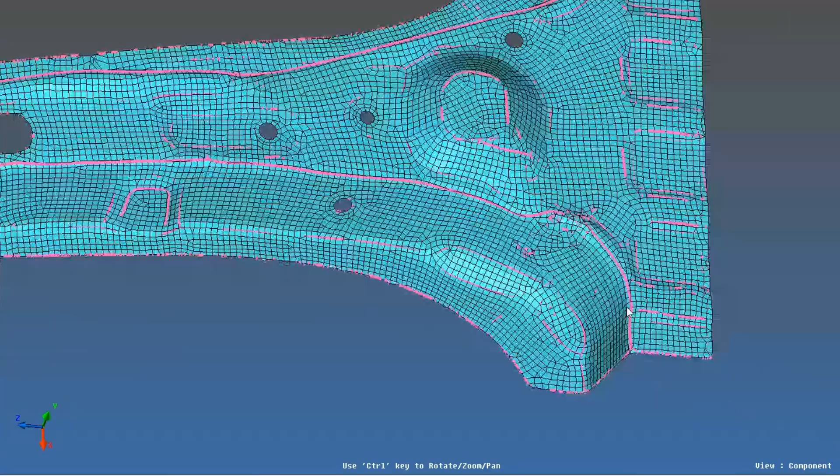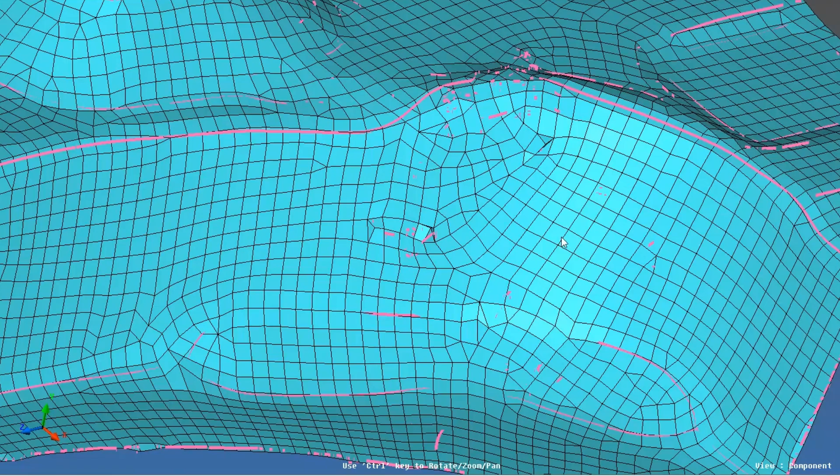And if you observe over here, there are some peaks present in the scan data - it has identified those as well. And if I turn it off, we can see a smooth transition happening in the flow. So the user can correct it very quickly with our highly automated tools and get the model ready for the solver run. Imagine using this tool, we can reduce days of work to hours of work.

So these are the few examples I would like to present for today. With this, we understand how we are using AI to prepare a model, identify features, and how we are incorporating it to do a meshing activity or a modeling activity. If you want, we can even do a deck setup as well.